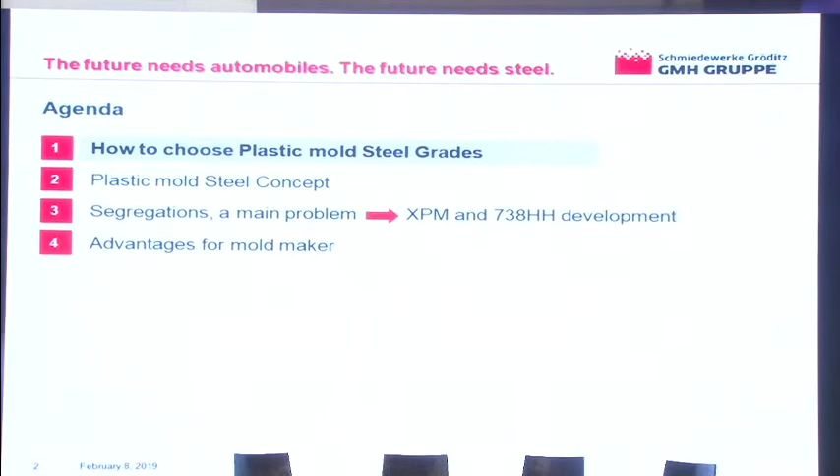In this presentation, our agenda is how to choose plastic mold steel. This is the most sensitive issue. In the last 21 years, Groditz and Anand has matured and grown with the market, where we started with very humble commodity grades like 2311, 2738. The market has eventually grown to a level where we can congratulate the tooling industry, because I saw yesterday the OEs have 75% of molds localized. So we have achieved a good target. I congratulate the tooling industry for that.

But now is the time where we have to go one up. It is very critical, because the steel which you choose is going to decide the outcome. We are going to play with very abrasive polymers. The quality of the components is going to be very high, and the demand is also going to be high. Some of the components, your demands are not going to be high, but you still have to maintain the quality. So this presentation is a brief in which we are sharing our experience of the Indian market, the Indian tooling industry. So I hope we justify it.

In this presentation, there are 6 factors to choose a mold steel, and these are to be very carefully monitored before you decide or say yes to your customers to make any mold. Because if you do any mistake here, then it's a disaster, it's a catastrophe. And the only thing which you cannot give back to your customers is time which is lost. Everything can be paid, everything can be got back, but not the time which is lost, which is very crucial today.

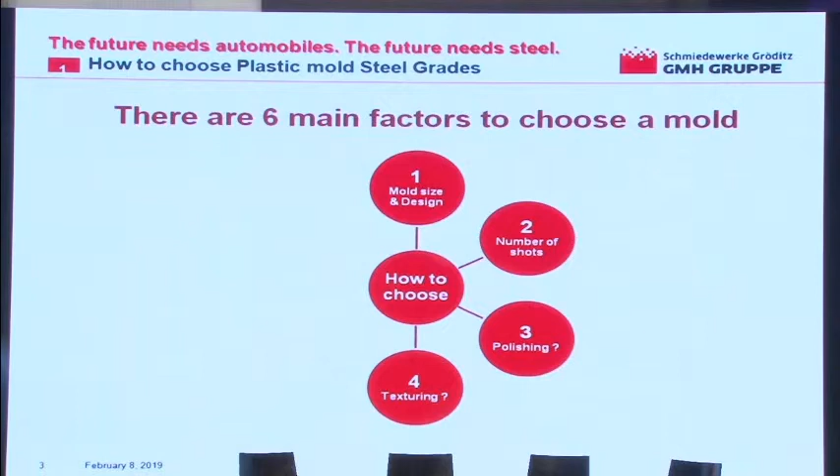Next is the texturing part, which we have mastered. We have a lot of companies doing texturing, and for that, the next requirement is for SUVs or MUVs, which have textured bumpers. The bumpers in the past were just polished components which were painted, and they looked good.

But now with these bigger cars, you have textured parts which have to be taken care of. There is no compromise, and we've seen a lot of customers coming to us in the last 2-3 years saying they used good quality steel, but the steel failed in texturing. This is the experience Groditz has taught us, and we have a steel that is going to give you a 100% solution. Once you've bought steel with all the right parameters, you are 100% going to deliver customer satisfaction.

As Jonathan was also saying, you have to do things right the first time. Cost doesn't just mean buying cheap stuff and then having to do it again and again, which makes your cost go up. Ultimately you end up paying more. So do things right the first time, and of course the basic plastic mold steel takes good care of the current requirement.

We have championed underbody parts, we have championed texturing, and we are now entering interiors, which have also been satisfactorily delivered. But now these are the critical ones where this 25% is going to matter a lot, and this is the right test for which we have to prepare ourselves.

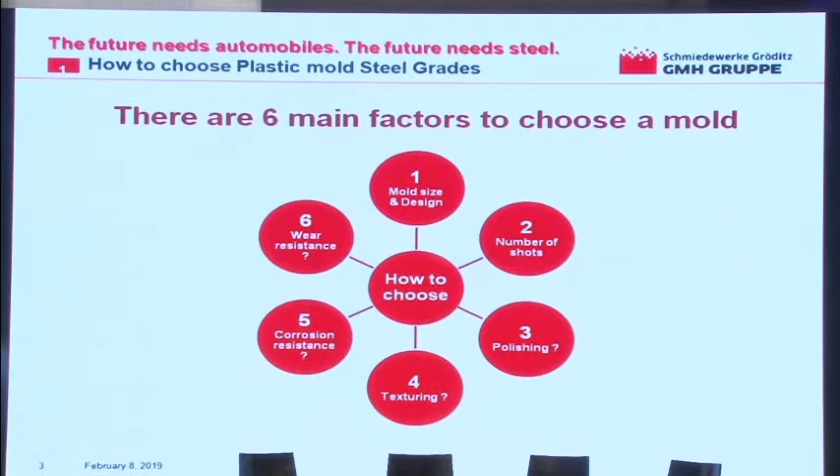Coming to the second point of our agenda, the plastic mold steel concept. The concept is very clear: today we are going to the next level, so we have to have a pure ESR, very high quality, very high melt steel. I'm happy to announce that Groditz is one of the largest and most experienced mills in the world, and those mills you can count on your fingers. Their experience spans the last 240 years.

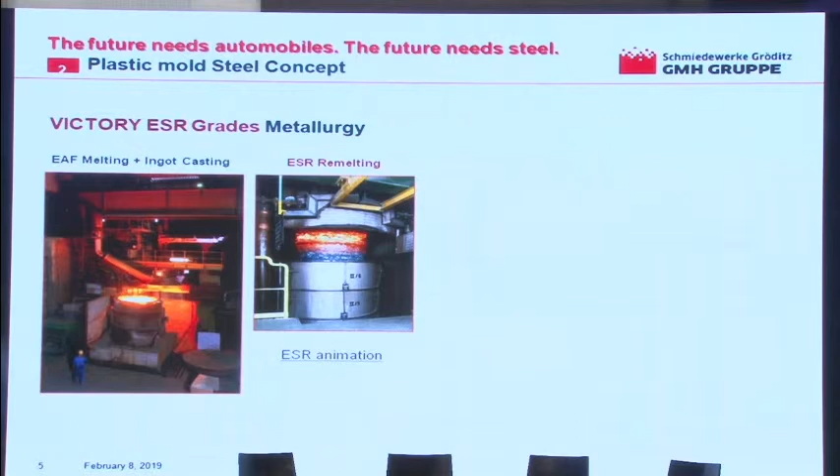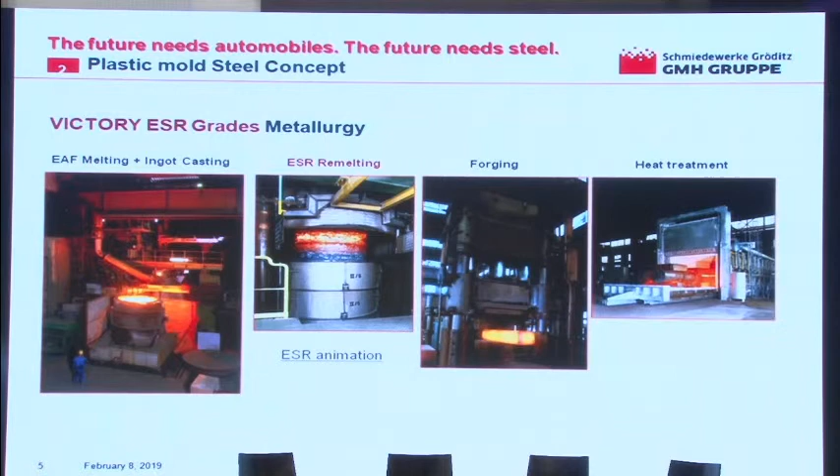So now they don't make those conventional stereotype steels—they invent, they innovate. These slides give you the basic idea of what ESR melting is. We have vacuum degassing, which is how conventional melted steels are done, and the second photo shows ESR melting. Groditz has the largest capacity, where we can produce a single block of 82 tons—a huge single ESR block. So we have this forging after ESR, and then the heat treatment.

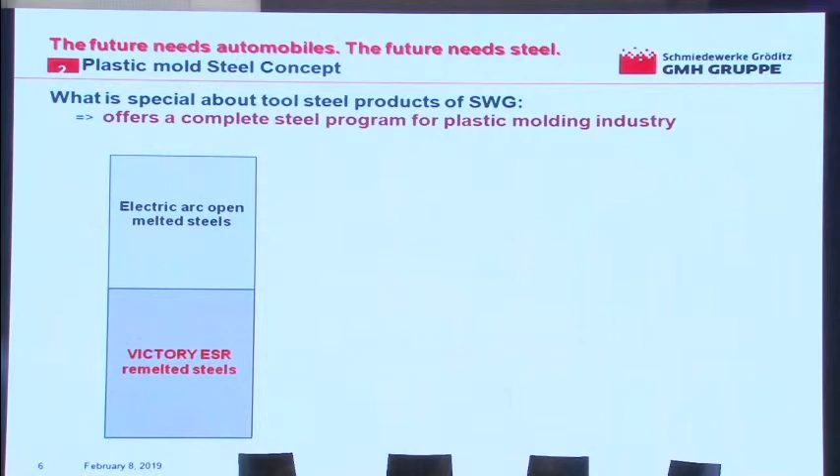What's special about the steel products produced by SWG? SWG is one of the few mills which can give you all the solutions under one roof. You don't have to go to a second or third mill to find your required grades. We have electric arc open melted steel facility and our ESR, and I'm happy to announce we cater to almost 17 different grades in plastic.

We are not talking here about hot work steels or other applications, just plastic. Today, where some mills stop production for a steel offered, we begin from there. In the last 240 years of experience, they have reached a level where some grades are patented grades of Groditz, which I don't think anybody else can offer. All this has been developed with our customers' feedback and experience.

So here we are talking about corrosion-resistant steel. This category, shown in gray, includes all the corrosion-resistant steels, both in conventional melted and ESR versions. Then we have the precipitation hardening steel—these are the age-hardened steels.

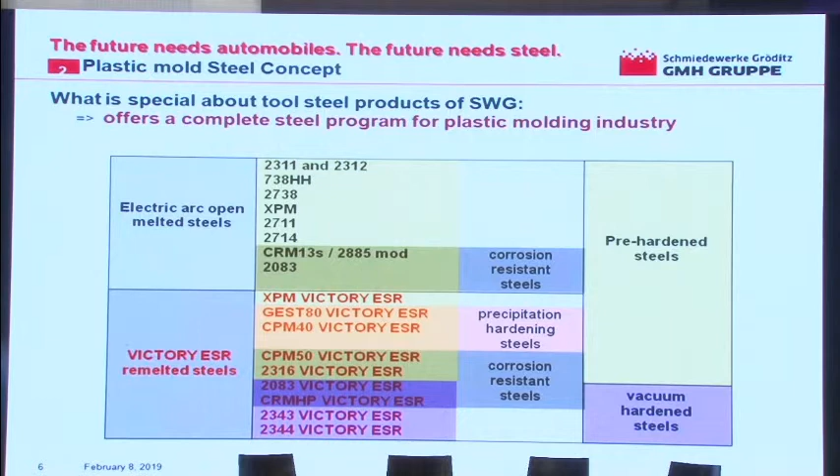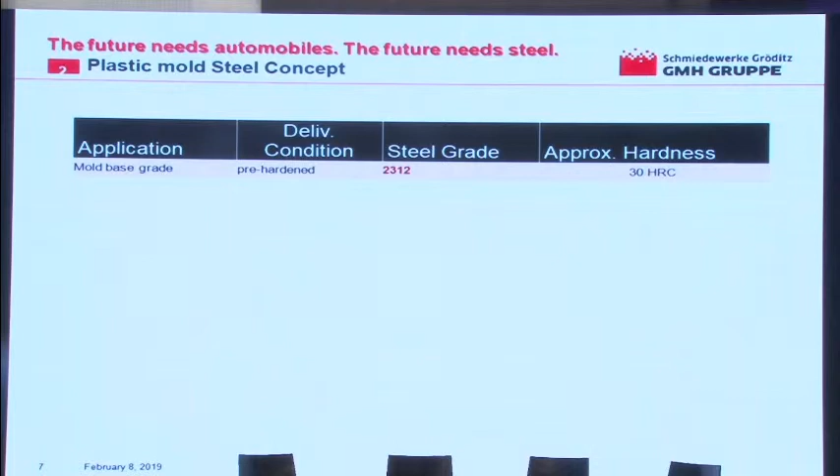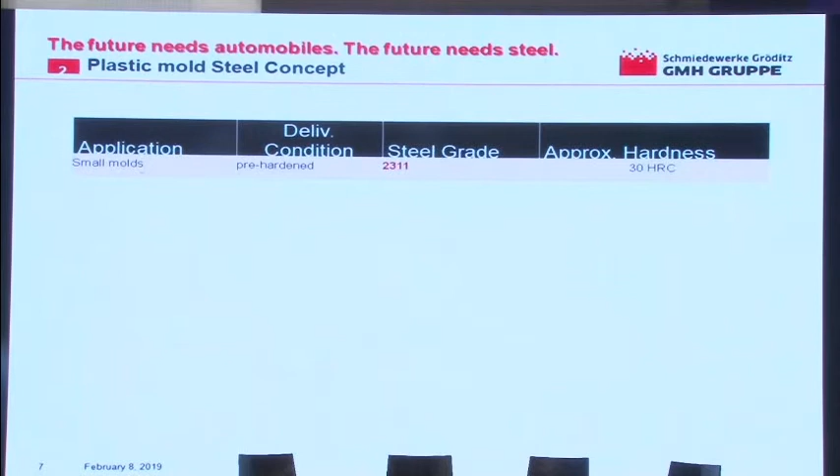Which you can use for doing your mold in the right way. First is your mold base steel, 2311, for small molds. Then we have 2738, which as you graduate to 300 or 400 thickness, you need a nickel-based steel to give you consistent hardness. But when you graduate above 600, 700 thickness, 2738 doesn't do justice—that's where 738HH comes into the picture.

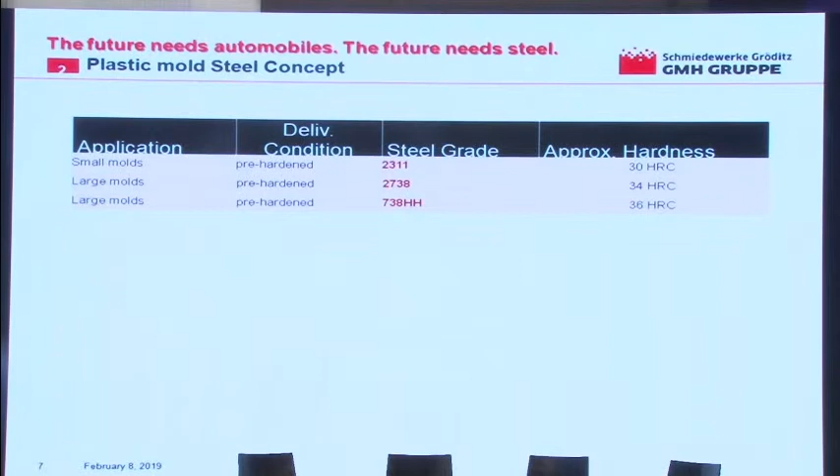This is the steel that is the answer for your big bumpers, where you have to do texturing and polishing. This steel satisfies both requirements. Then we have our champion grade, which is XPM.

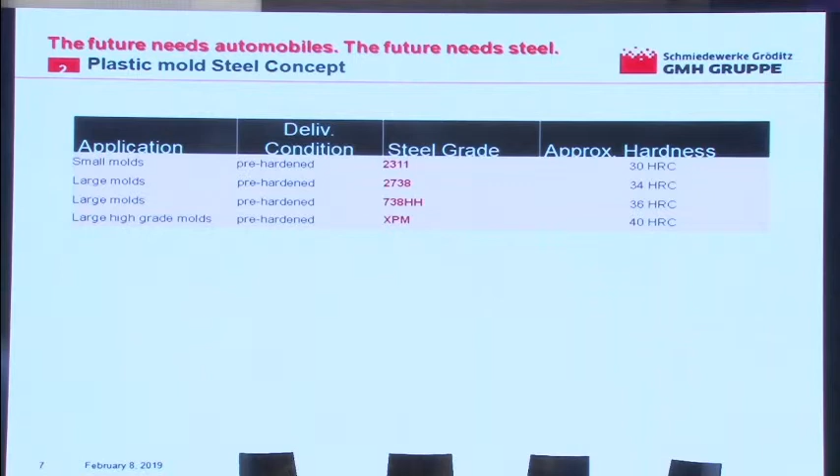XPM is nothing but a one-step upgrade to 738HH, where for hardness, some customers, especially in China, love high hardness steel—they want 40 HRC, 42 HRC. So XPM has been built for that requirement, which I think we will be maturing in the next 1 or 2 years, because the infrastructure required to machine such high hardened big blocks, big steel, is still with very few mold makers.

There was an instance I still remember, which I heard from the Groditz people, that Hella was making a mold in Germany for a car lamp—we're talking about the Audi A8, a very premium and very big lamp. They were using 2344, 2343 steel, and in heat treatment, the steel block got cracked, and the launch of the vehicle was in the next 3 months. What do you do? That's where the XPM Victory ESR steel was introduced to Hella, and it was done within a record 2.5 months. They made the mold and delivered the component to the customer's satisfaction.

So today, pre-hardened steels are going to be the future. You cannot rely on those age-old conventional or old-school steels, because delivery times have cut down. Yesterday I was hearing that people want a mold within 21 days—how do you do that? Your heat treatment alone takes away another 10 days. So when will you make the mold? These grades are going to make a big difference.

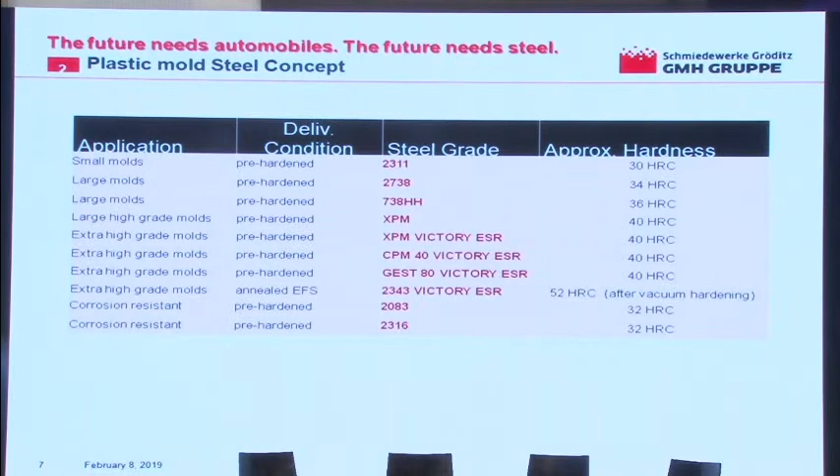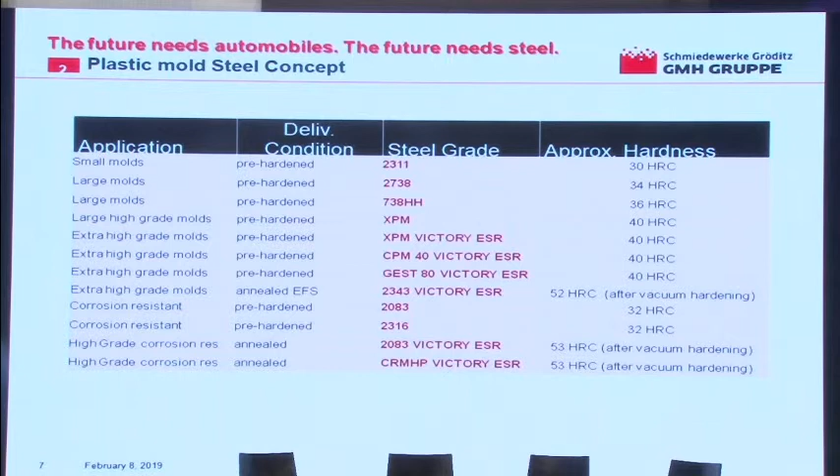Okay fine, I'll do it fast. So again, corrosion resistant steels, and you have these pre-hardened ones. We have high grade, high corrosion steels where you have to go with higher hardness. Of course, there you have to do the heat treatment, because there is no steel mill right now on this earth which can deliver 53 HRC pre-hardened steel in ESR and deliver those big blocks which are required. Of course, you can buy the steel, small blocks, whatever is required, you have to do the heat treatment, and then you get your component.

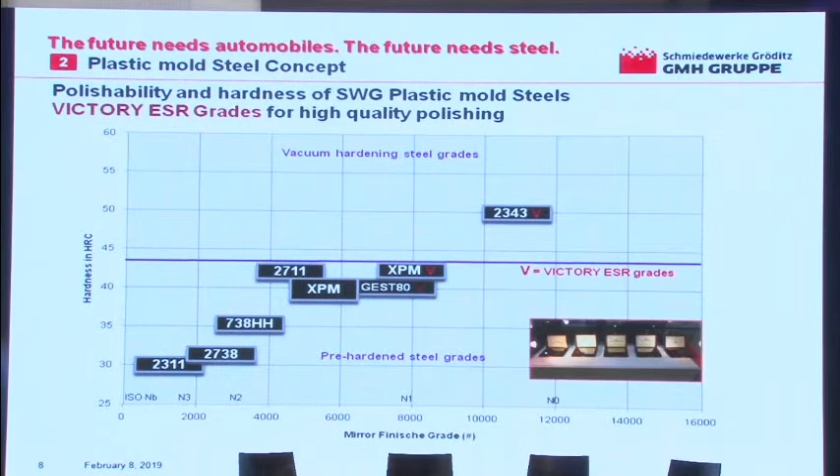Then we have XPM, which is doing magic, where some of the lamp manufacturing companies for the rear lamps have used XPM, and XPM has delivered fantastic results. When you move ahead to the high-end ones, where you have to make the lens or a transparent article, or the polymer is nylon, glass fiber 30%, 40%, these steels are going to be a solution for this.

Then when you move ahead to the high-end ones, where you have to make those reflector molds, because now even in Tagma we have been promoting our mold makers that we don't want to do what our friends or our fathers or our grandfathers have been doing. The market is too big, and this 25%, mind you, where we are going to now upgrade ourselves, this is the market where really you make money as well. So here we have been slogging, we have been eating from that same pie, and everybody wants to have their share, and the cost has become such that you don't make money nowadays.

So you upgrade yourself to such high-end molds, where you enter the lamp industry, lighting industry, or you do the electrical molds. This is going to make you even much better to deliver precision, good quality molds, and this will give a lot of respect also. Today, to earn this respect, we have to perform, and if we are in a position to perform to this highest level of precision, I don't think anybody can stop India from proving its mettle.

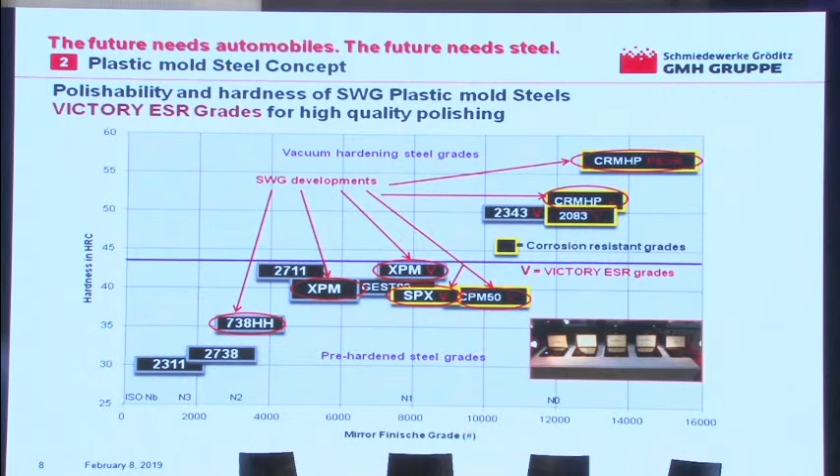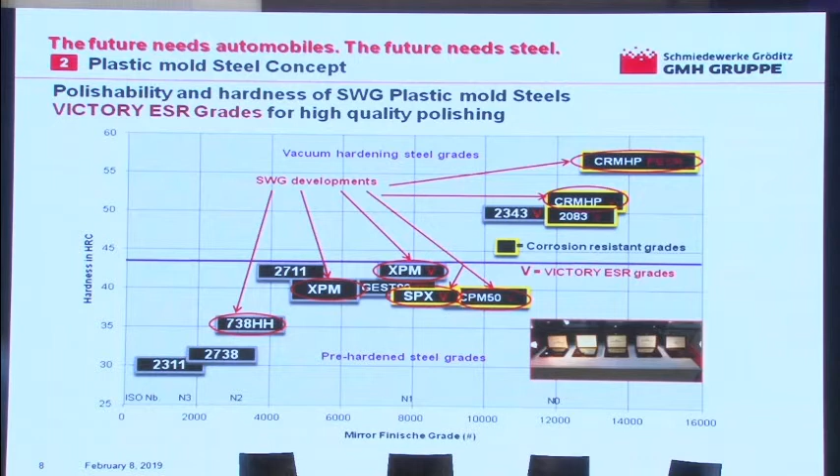One tool room has one machine, another has got three. You can use the other tool room's three machines and reduce the cost. Why invest more in machines when your neighbor has it? So we are fragmented, and Tagma, I really appreciate the work the EC members are doing. I'm also part of the Mumbai chapter, and we are preparing a very big cluster. This cluster is going to be an answer to all other states in India where everybody has to work united. Otherwise, as the previous panelists said, somebody is taking away our business, and they will keep denting your business, and you cannot do anything.

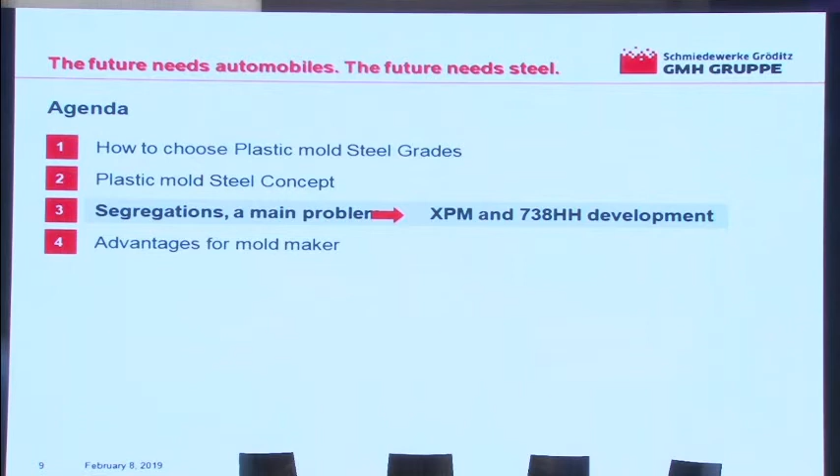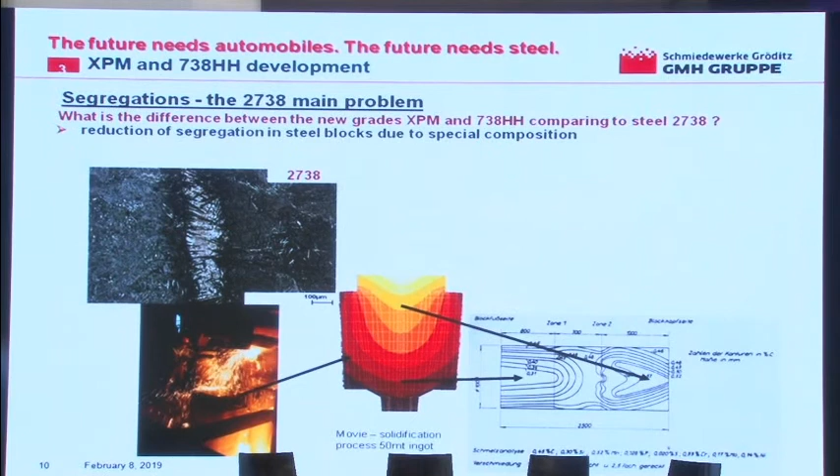Segregations, a main problem, I think I'll close this, because this is something people already know. The segregation, my previous friends from the other steel companies have also explained, so it doesn't make sense me repeating the same thing.

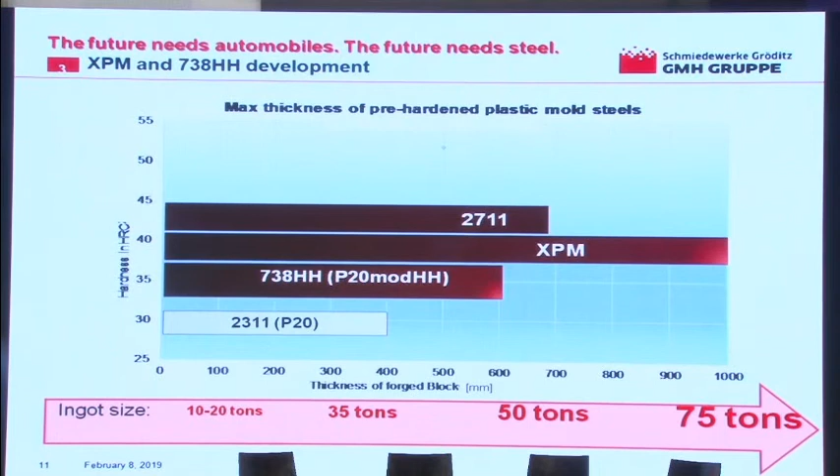These are the charts which we would like to even share with our customers, whosoever wants, no problem, because this is where it's very important that you should know what size, what grade you have to select. If you choose looking at the cost for a cheaper version or cheaper steel, then you are surely going to end up in a problem.

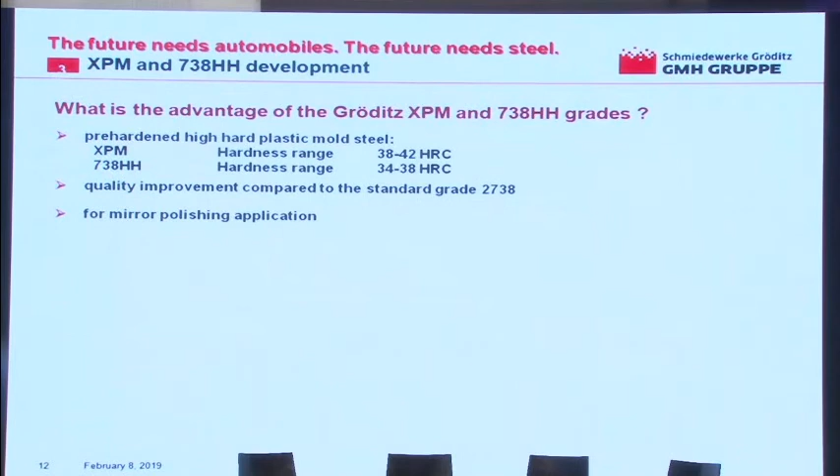Advantage is, again, 2738 improved quality. You get good homogeneity, ESR quality material, which is conventional melted, but still you get an ESR quality material because of the alloying and the process followed by SWG.

One more advantage, the pre-hardened steels were never used in thicknesses above 600, 700. Today you get even 1000 thickness if you desire. So we are in a position to deliver those blocks in the highest tonnage.

Again, you have better texturing and polishing, which I have already explained. So you don't need to do interim stress relief even after heavy machining, because the alloying is so fine that it doesn't develop any stress even during production.

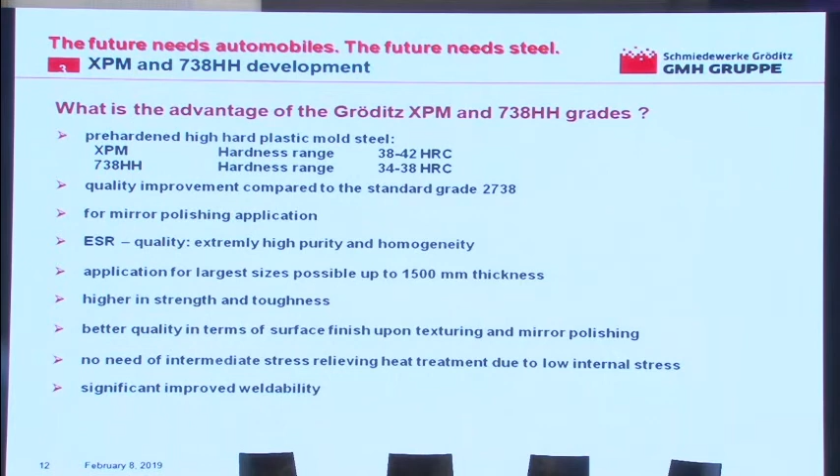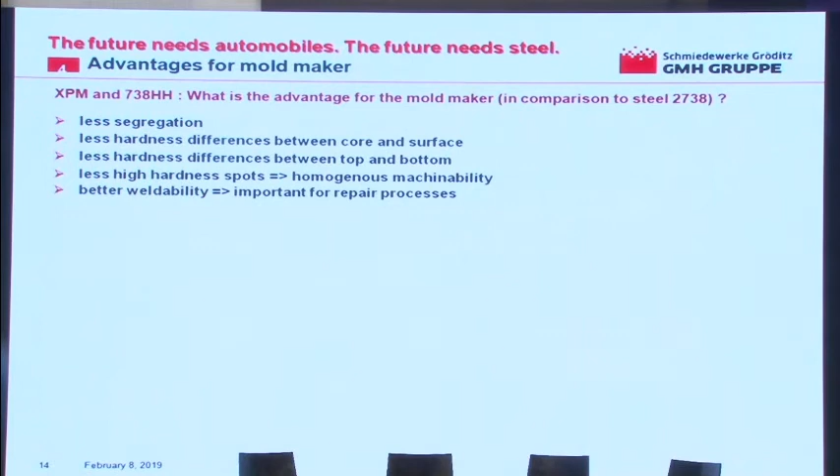Weldability, I would not advise, but yes, weldability is very good. Keep away from that though, because that is going to create a lot of problems in your mold if it is welded.

This is again one aspect of texturing. There are certain geometries which are, in today's world, very complex in texturing, and our XPM and 738 can match all those challenges.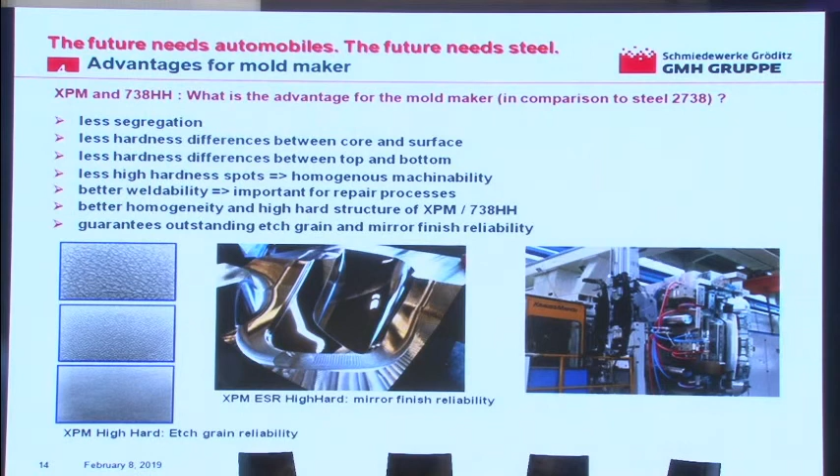Advantages: yes, you don't have to harden, you can deliver faster. The only disadvantage is the wear resistance. When you have a higher hardness requirement, that's where our XPM or ESR pre-hardened steels will not be as effective.

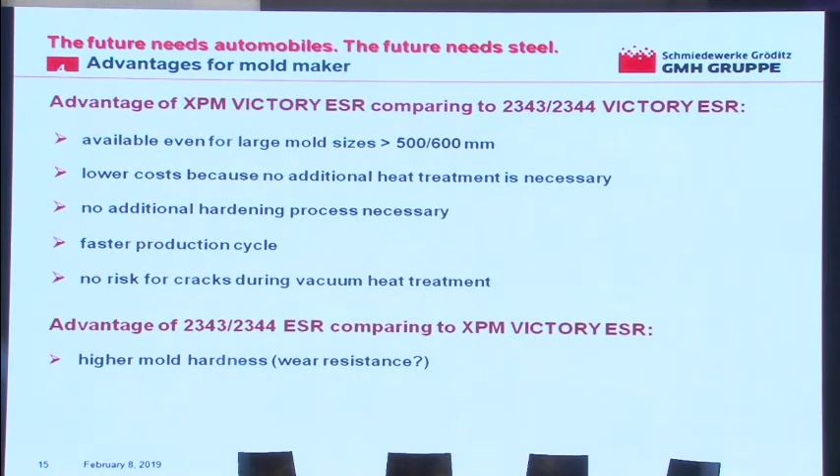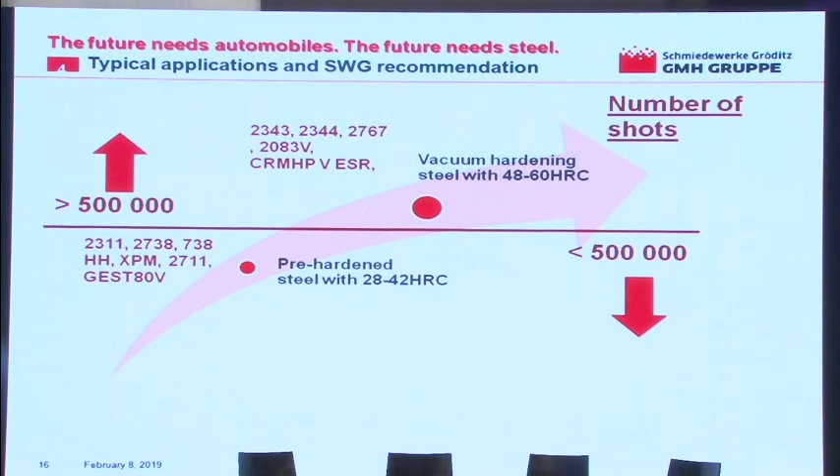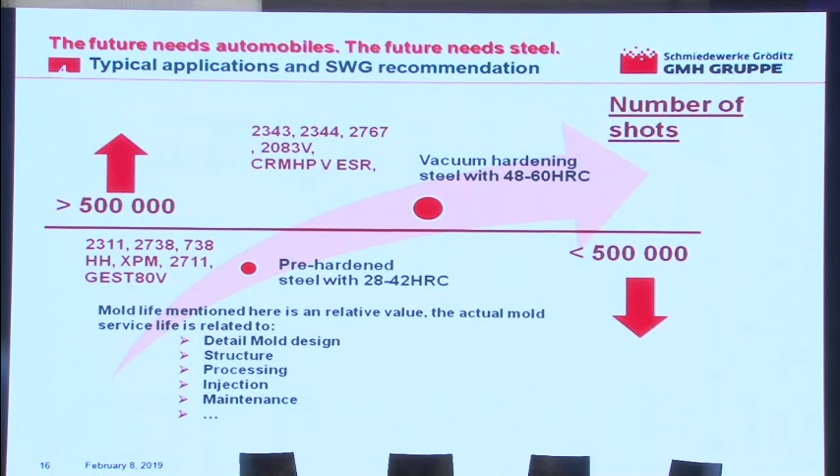Applications, as I said, the number of shots required also decides the steel you have to purchase. So if it is 500,000 shots, the general steels or conventional melted steels will satisfy your requirement, but when you go above 500,000, you need the higher hardness steel, because the requirement of wear resistance and toughness means you have to harden and go into the ESR category.

We always try to go to the customer, and our only request is please throw us the challenges. What is the problem, and we would like to be your solution manager. So let the steel speak to you guys.